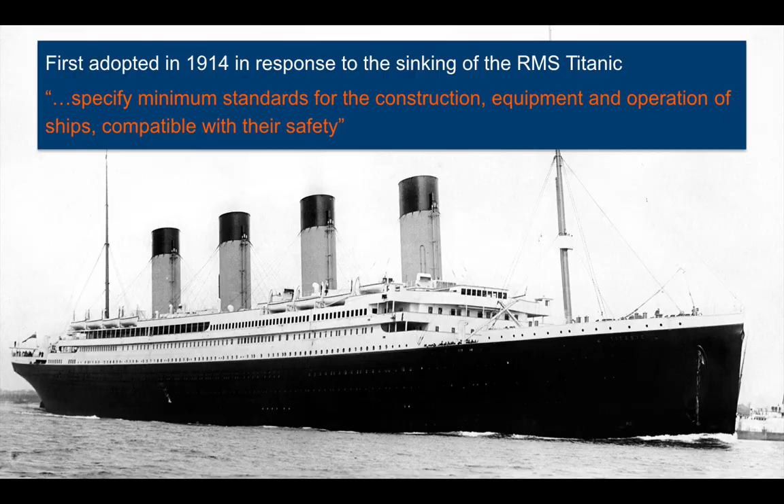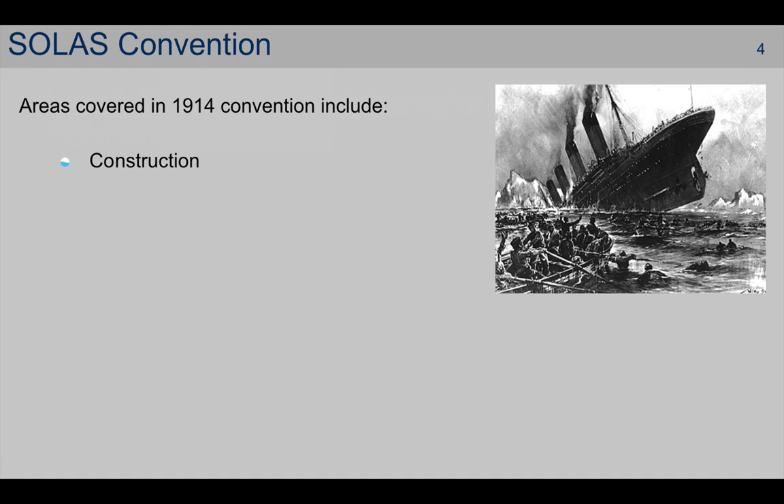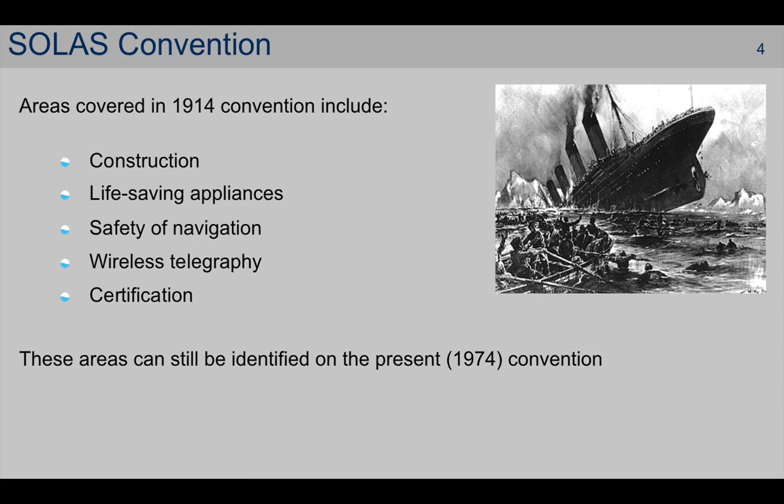The main objective of the SOLAS Convention, as stated in the International Maritime Organization, is to specify minimum standards for the construction, equipment and operation of ships compatible with their safety. The sinking of the Titanic, the unsinkable ship, gave rise to the development of the Safety of Life at Sea Convention. It is a key maritime convention. The areas covered in the original 1914 convention included construction, life-saving appliances, safety of navigation, wireless telegraphy, and certification. With the exception of wireless telegraphy, which is given over to satellite communications, these systems can already be identified in the present 1974 SOLAS Convention.

There are at present 13 chapters in the SOLAS Convention. Each chapter covers a different topic of interest. It is expected that a 14th chapter, concerned with the adoption of an international code for the safety of ships operating in polar waters, known as the Polar Code, will be added in 2017. Flag states are responsible for ensuring that ships under their flag comply with the requirements of SOLAS. A number of certificates are prescribed in the Convention, and these have to be retained on board the ship as proof that the flag state has complied with its responsibilities.

This lecture is now going to consider Chapter 9, the management for the safe operation of ships, which requires the compliance of all ships with the International Safety Management, the ISM Code. This is concerned with improving the quality of ship management. The development of the ISM Code was the direct result of the capsize of the roll-on roll-off ferry Herald of Free Enterprise in 1987. A picture of the ship is shown here. The Herald of Free Enterprise was leaving the port of Zeebrugge. Its bow doors were open and that was unknown by the bridge. On departing from the port and entering into the English Channel, water was taken on board onto the car deck. A capsizing moment was created and the ship capsized, fortunately capsizing onto a sandbank.

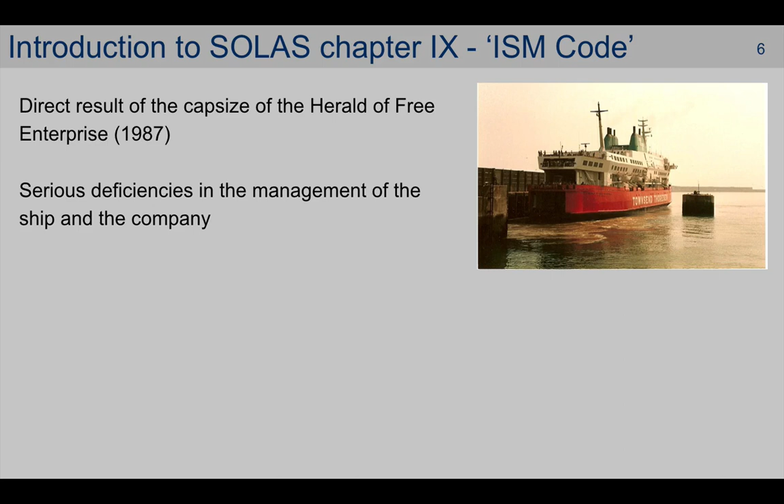Nonetheless, 193 persons died and questions were asked. This was the biggest loss of passenger life on board a British ship since the sinking of the Titanic, except of course for wartime. An inquiry was established, and it was found that there were serious deficiencies in the management of the ship and of the company. And whilst the open bow door was the initial cause of the incident, it wasn't the only cause. The judge who conducted the inquiry, Lord Justice Sheen, made this statement which is well known. He said that from top to bottom, the body corporate was infected with the disease of sloppiness. The incident was only one of many in the 1980s in which concerns were raised about the human factor and the culture in the shipping industry towards safety.

An opportunity was taken, the creation of the International Safety Management Code. This was the response which supported changing attitudes towards safety in the shipping industry. A culture of unthinking compliance with external rules moved towards a culture of thinking self-regulation of safety and the development of a safety culture. That is, a culture in which every individual feels responsible for actions taken to improve safety.

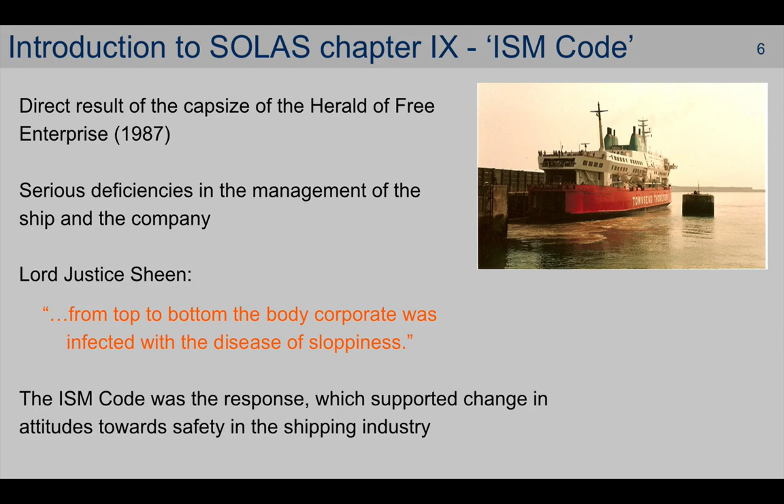The aim of the International Safety Management Code is to ensure that safety at sea, the prevention of human injury or loss of life, and the avoidance of damage to the environment are in fact maintained. To ensure that the objectives can be accomplished, a shipping company must devise safety management objectives. Amongst other matters, they must provide safe practices in ship operation and a safe working environment.

The objectives must also assess risks to the ship, to personnel, and to the environment. And finally, they must improve the safety management skills of not only personnel aboard the ship, but also ashore, including, of course, in preparation for emergencies.

A safety pyramid diagram is shown here which illustrates the relationship between unsafe acts, near misses, lost time and death. Time and effort spent in reducing unsafe acts will eventually reduce the number of accidental deaths. As seen in this particular pyramid, 30,000 unsafe acts will lead to 3,000 near misses. 3,000 near misses will lead to 300 lost time injuries, and 300 lost time injuries will lead to one death.

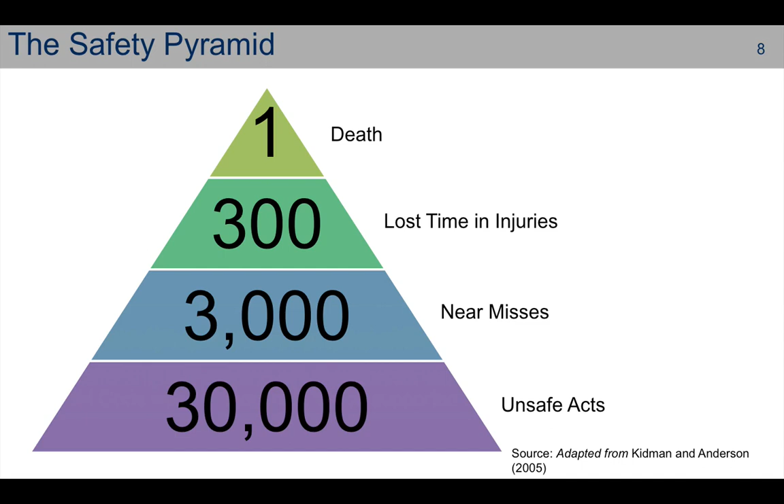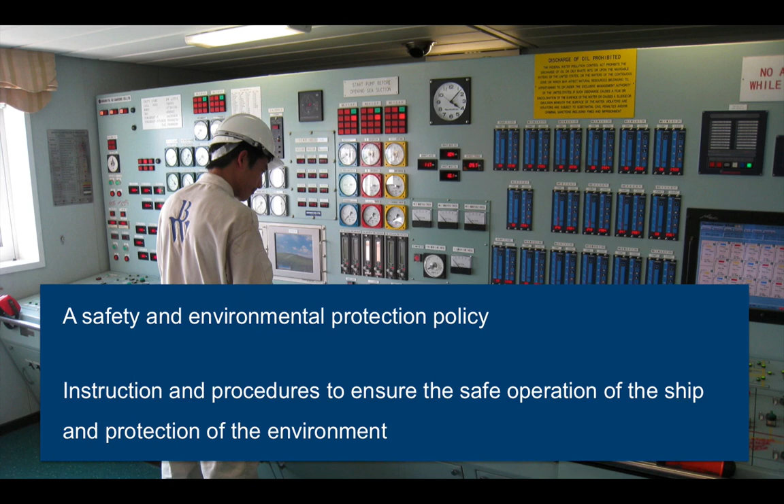The SMS, or the Safety Management System, is a requirement of the ISM code. Every ship is required to have a safety management system on board, and this will include the following: a safety and environmental protection policy, instructions and procedures to ensure the safe operation of the ship and the protection of the environment in compliance with international and state legislation, define levels of authority and lines of communication, particularly between shore and ship-based personnel.

In addition, procedures for reporting accidents and also for reporting non-conformities, procedures to prepare for and respond to emergency situations, and finally, procedures to undertake internal audits and management reviews. Whilst there have been objections to the establishment of safety management systems, what is actually undertaken is nothing less than best practice, which has been undertaken by many shipping companies throughout the years.

It was recognised that there were problems in implementing the ISM code. First of all, the safety management system requires commitment. Commitment from the top. That is from the directors, the managers and the supervisors. You may ask why. Well, the directors, managers and supervisors have got interests which of course are of a financial type. But in addition to that, they are now being forced to ensure that they have an interest in safety of their ships which they operate. So commitment from the top is what is necessary.

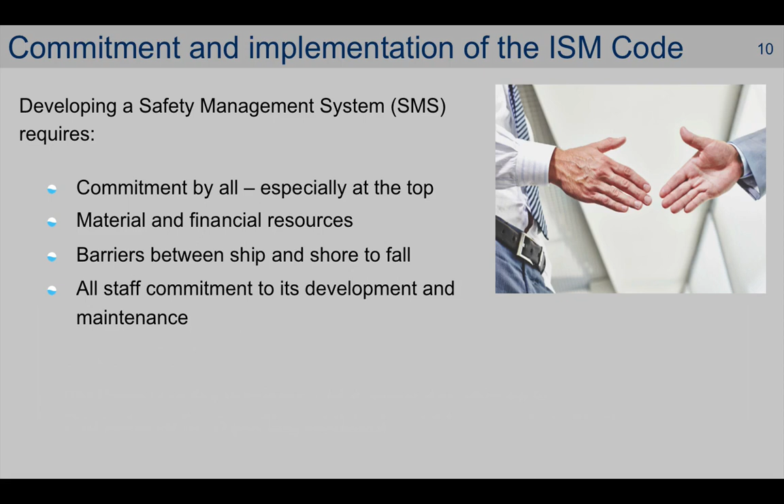In the past, the ship's master was master to none other but God. Today, the ship's master is an employee of a shipping company. He therefore has to, in fact, work within the requirements of the shipping company. The shipping company also has to recognise this, and so there has been established somebody called a DPA. A DPA is known as a designated person ashore.

To ensure the safety of the ship, and that links are provided between the company and those on board a ship, a member of management will be given the responsibilities to confirm the effectiveness of the safety management system, to report deficiencies to the highest level in the company, and to organise safety audits.

A designated person ashore is not just anyone. He is a very special person who will have experience in both safety and pollution control activities. It is a major responsibility of a person who will usually sit on the board so that he can report to the board the concerns and the issues which have been passed to him through the ships and the ship's masters.

The ship's master has already been mentioned. He has overall responsibility and authority for what goes on board the ship. He is also required to implement the safety management system on board the ship. He has to observe the safety and environmental policies established by the company, and he has to motivate the crew in the methods required by the safety management system.

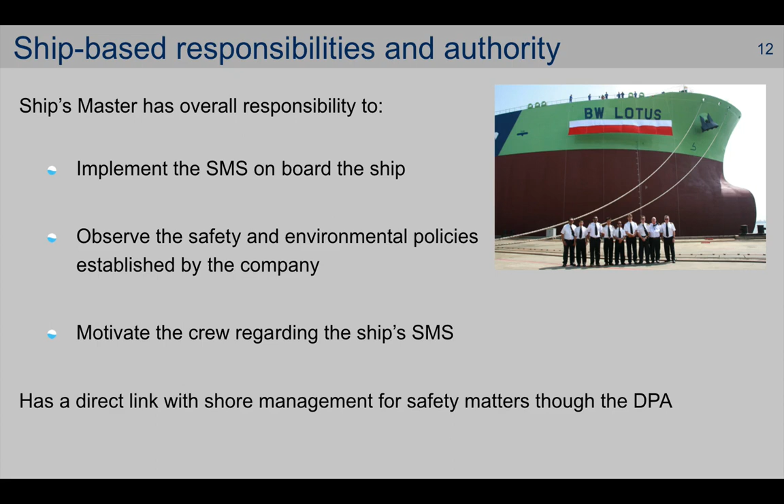This diagram illustrates the important component parts of a safety management system. All elements are part of good operational practice. The diagram, which is adapted from a Seafarer's Guide to ISM, originally published by the North of England P&I Club, has at its centre the safety management system.

Crew training and familiarisation, safety management manual, reporting non-conformities, accidents and hazardous occurrences, auditing, key shipboard operations, maintenance of ship and equipment, contingency planning, and a management review are all part of the safety management system. And we will look at some of these now.

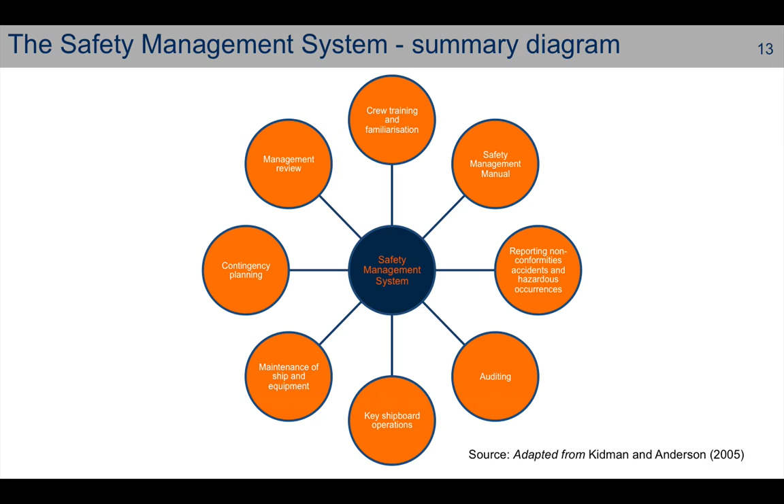Training and familiarisation are critical issues for the safety management system. Statutory training courses have to be undertaken by all sea staff, as required by the Standards of Training, Certification and Watchkeeping Convention, known simply as STCW. Safety training courses will include firefighting, the use of life-saving appliances, and for deck officers, the use of electronic systems such as ECDIS.

The safety management system will require training drills to be carried out. These are carried out to cover likely emergency situations which could occur to the ship. Crews are required also to be familiar with the ship, and this requires something known as familiarisation.

This is an important part of the safety management system and avoids what is sometimes called the pier head jump, where persons will be employed aboard a ship without actually having familiarised themselves with the ship and its equipment before the ship sets sail. So that familiarisation then ensures that duties, including safety management system duties, are always maintained at effective performance levels.

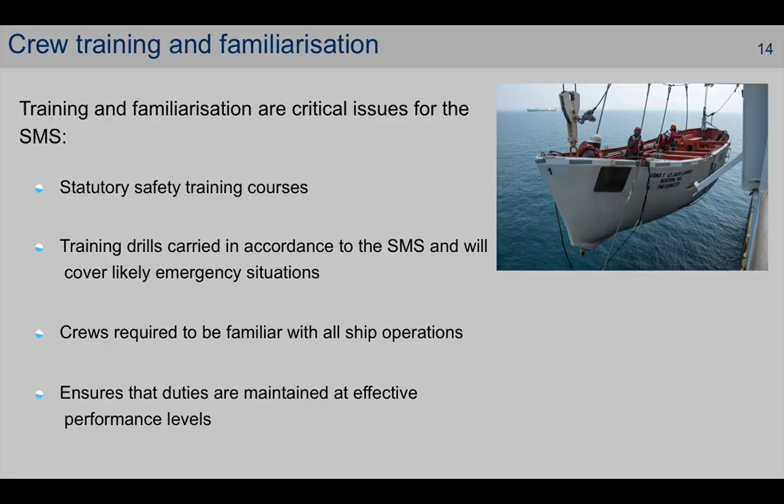It is a requirement of the ISM Code that a company should establish plans for shipboard operations. The subject matter of plans can be developed for many activities, and indeed each ship will have its own individual activities which have to be considered. The International Chamber of Shipping provides guidelines on the application of the IMO International Safety Management Code, and it covers 5 scenarios. These are covered under the headings General, the ship in port, preparing for sea, the ship at sea, and preparing for arrival at port.

It is also suggested that the type of operations can be split between special shipboard operations and critical shipboard operations. Special shipboard operations are those where errors may become apparent only after they have created a hazardous situation, or after an accident has occurred, such as charts not being updated.

Critical shipboard operations are those where an error could immediately cause an accident or situation which could threaten people, the environment or the ship, such as navigating in areas of high-density traffic. Summarising this slide, there are 5 scenarios which are provided, and within each of those scenarios we can look at and critically suggest special shipboard operations and critical shipboard operations.

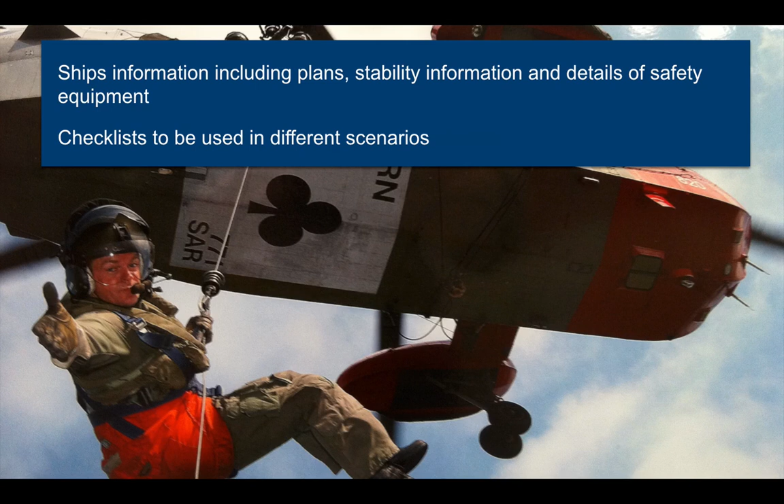The shipboard contingency plan will consider the different types of emergencies, as indeed it does for the shore-based contingency planning. It too will allocate the duties of those on board and in fact concern itself with the actions to be taken to regain control of a situation. Of importance to be considered are communication methods, both used on board and between ship and shore. And finally, the ship has got also to consider procedures associated with dealing with the media.

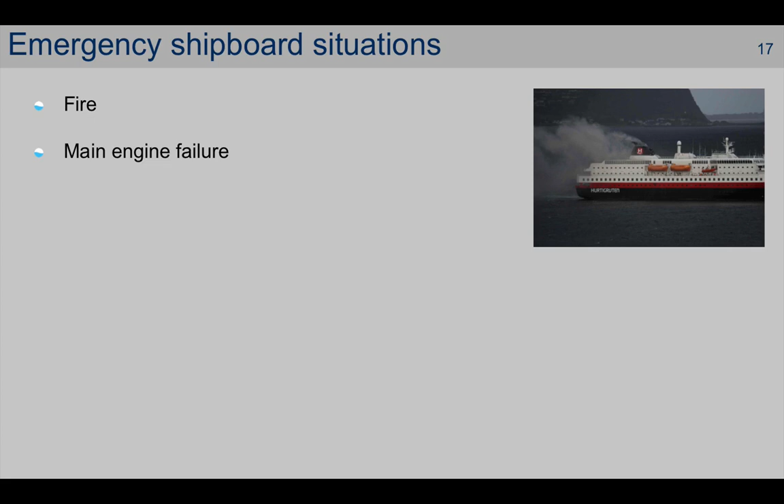There are many potential areas which may give rise to an emergency shipboard situation, including fire, main engine failure, collision and grounding, structural failure, man overboard, cargo shifting, heavy weather damage, terrorism and piracy. Is that all? No, perhaps you could think that there are some other areas which could give rise to an emergency on a shipboard situation.

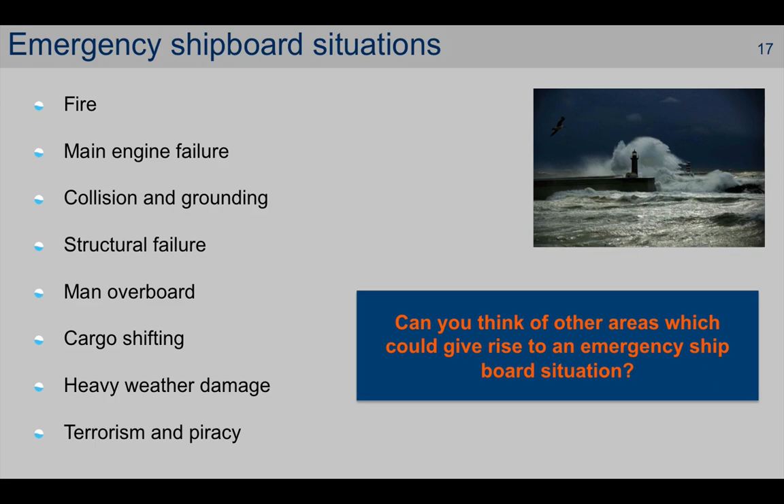The safety management system also requires reports of non-conformities, accidents and hazardous occurrences to be made. Very simply, under the SMS, the master has to report the following to the designated person ashore: accidents, hazardous occurrences, non-conformities within the SMS, and suggested modifications to the safety management system. These reports have to be analysed, and after analysis, they may lead to corrective action being taken.

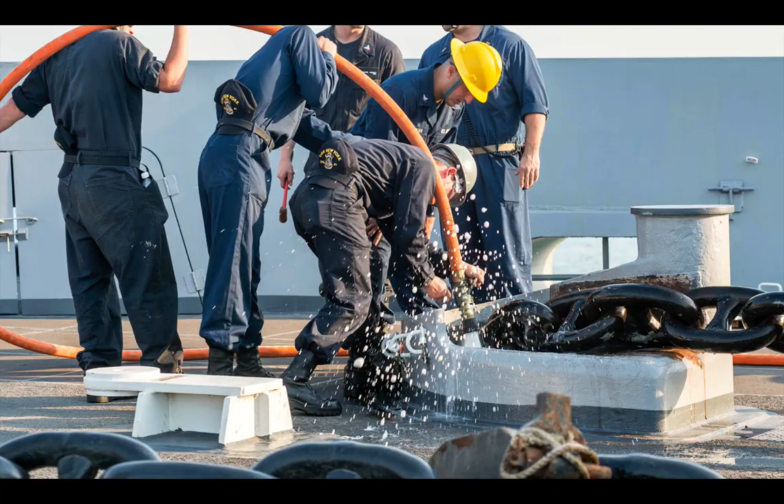It is always incumbent on a company to establish procedures to ensure that the ship and its equipment is maintained as required by the relevant international, national and company regulations and requirements. Procedures are established to ensure that maintenance, repairs and relevant surveys are carried out in a planned, safe and timely manner, ensuring that the seaworthiness of the ship is maintained at all times. As Port State Control inspectors will say, sometimes this is not undertaken as it should be.

A company is required to establish and maintain procedures to control all documents and data relevant to the SMS. The documents may be referred to as the Safety Management Manual. They can be kept in a form that the company considers most effective, either electronic, paper, or sometimes a combination of both. Under SOLAS Chapter 9, a Document of Compliance, abbreviated to DOC, is issued to every company which complies with the ISM Code. It is issued by the flag state, and the DOC is valid for 5 years.

A ship is provided with a Safety Management Certificate, abbreviated to SMC. This is provided by the flag state again. It follows an initial verification of compliance with the ISM Code. It also requires that the company responsible for the operation of the ship has an appropriate DOC. A Safety Management Certificate, like the Document of Compliance, is valid for 5 years.

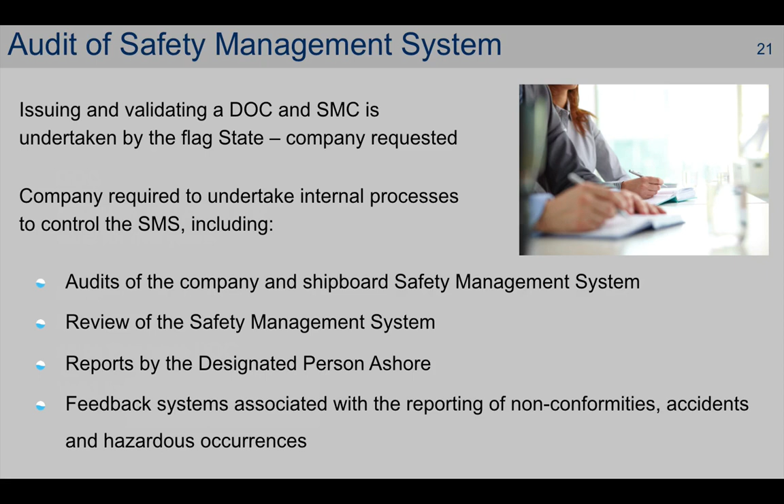The reason for the development of the ISM Code was to improve the quality of safety management of ships. The basic idea was to establish best practice across the international shipping fleet. Overall, this has been done. There is criticism as to how much additional bureaucracy some systems have created. Since the full implementation of the ISM in 2002, there have been a significant number of reductions in marine casualties and lives lost at sea. The ISM Code has established self-regulation and a safety culture.

Having followed this lecture, you should be able to outline the contents of the Safety of Life at Sea Convention. You will recall there are 13 chapters at present, with a 14th chapter pending. You should be able to examine the objectives and implementation of SOLAS Chapter 9 and the importance of the International Safety Management Code. And you should be able to distill the responsibilities of the ship's master and the shipping company for the development and implementation of a safety management system.

A useful paper to read is titled Implementing an Effective Safety Culture and can be downloaded from the website of the International Chamber of Shipping.